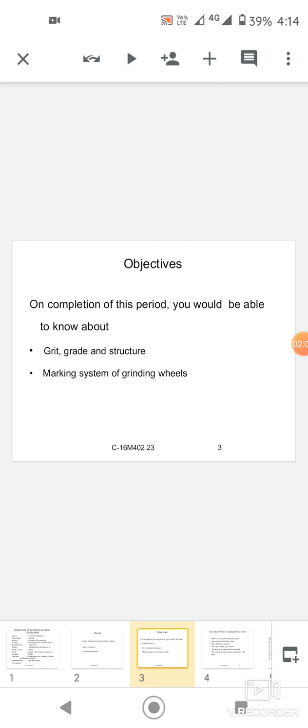This is the grinding wheel characteristic grit. It refers to the size of the abrasive grains. It influences the following factors: type of finishing desired, the material being machined, the amount of material to be removed, the area of contact between wheel and workpiece.

What is meant by grit, grade, and structure? First, grit. It refers to the size of abrasive grains. They are graded for size by passing them through a range of sieves, each of which has a definite size of the mesh. The meshes are generally used at building construction to remove particles from sand. The grains are numbered according to the smallest mesh through which they have passed. An abrasive grain and grit.

The term grade as applied to a grinding wheel refers to the tenacity with which the bond holds the abrasive grains in place and does not refer to the hardness of the abrasive. A wheel from which the grains are released rapidly during the grinding operation is called soft grade. A wheel that retains the grains more securely is called hard grade. By varying the amount and composition of the bond, wheels of different grades are obtained, discussed in the next slides.

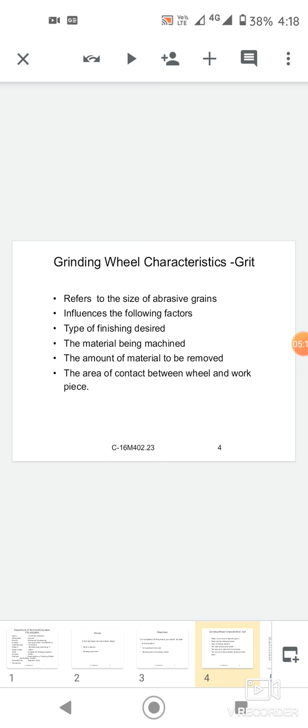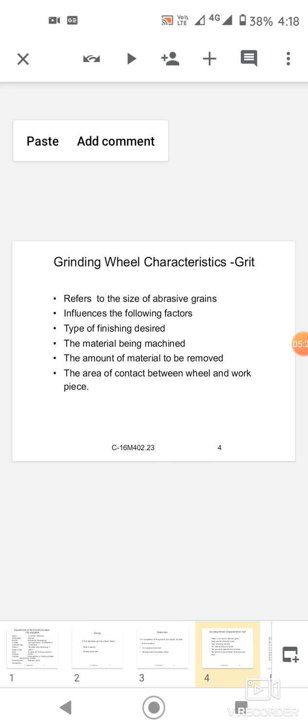Open structure grinding wheels are used on soft, tough, and ductile materials with heavy cuts, whereas dense structure wheels are used on hard and brittle material with finishing cuts.

This is the grain size or grit. An abrasive grain size 36 will pass through a mesh with 36 holes per linear distance of 25.4 mm, but will not pass through a mesh of the next smaller size. The usual size ranges from 10 to 120, number 10 being very coarse, meaning large grains, and 120 being fine, small grains.

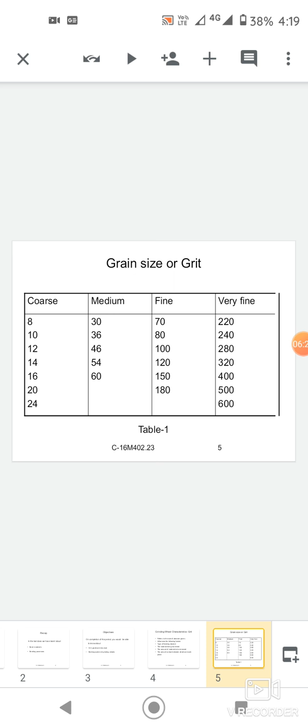Commercial grain sizes are classified as in the following table. This is the aluminum oxide abrasive grit particles. Abrasive grains for grinding wheels.

The grit size of a grinding wheel depends on the following factors: the type of finishing desired, material being machined, amount of material to be removed, area of contact between wheel and the workpiece. The first one is the type of finishing desired. Fine grains are used for producing smooth and accurate finish.

Material being machined: coarse grains are generally intended for soft materials while fine grains for hard materials. The amount of material to be removed: coarse grains are used where large amount of material is to be removed and the surface finish is not important. In the area of contact between wheel and the workpiece, for wider area of contact, a coarse grained wheel is generally used.

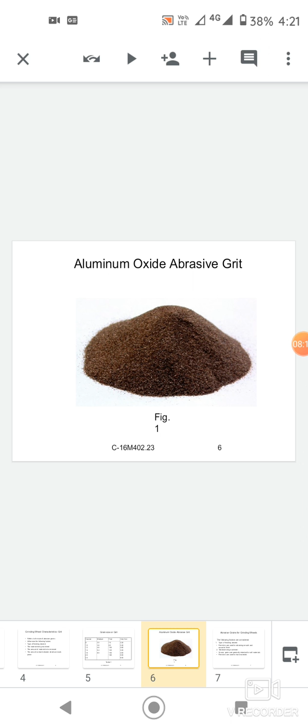Next is the abrasive grains for grinding wheels. The following factors: the type of finishing desired. Fine grains are used for obtaining smooth and accurate surface finish. Material being machined: coarse grains are generally intended for soft material while fine grains for hard materials.

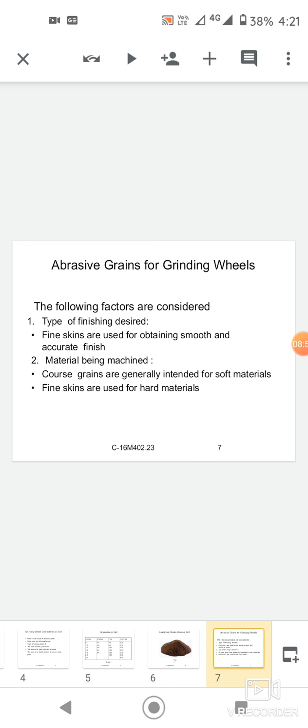Next one is the amount of material to be removed. Coarse grains are used where large amount of material is to be removed and the surface finish is not important. The area of contact between wheel and the workpiece: for wider area of contact, coarse grain wheel is generally used.

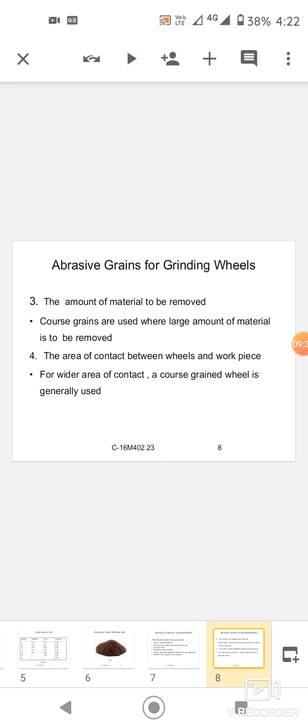Next one is the grinding wheel characteristic of grade. The term grade as applied to a grinding wheel refers to the tenacity with which the bond holds the abrasive grains in place and does not refer to the hardness of the abrasive. A wheel from which the grains are released rapidly during the grinding operation is called soft grade.

It refers to the tenacity with which the bond holds the abrasive. It is influenced by the following factors: the hardness of work material, area of contact, condition of machine, wheel and work speed. The wheel from which the grains are released rapidly during the grinding operation is called soft grade, whereas a wheel that retains the grains more securely is called hard grade. By varying amount and composition of the bond, wheels of different grades are obtained.

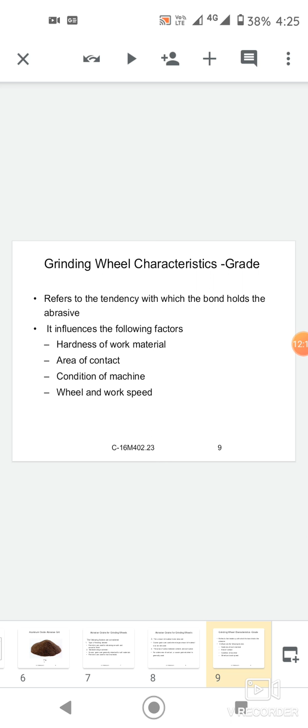Wheel and work speed: harder wheels are used for low wheel speeds and soft wheels are recommended for higher wheel speeds. On the other hand, hard wheels are used for high work speed and soft wheels for low work speed. These are the grades of grinding wheel. The soft grades are from A to H, medium is I to P, and hard is Q to Z.

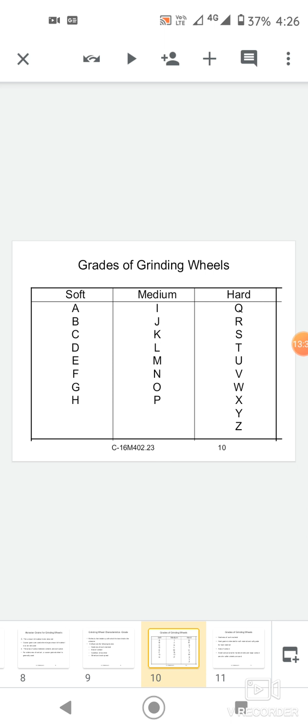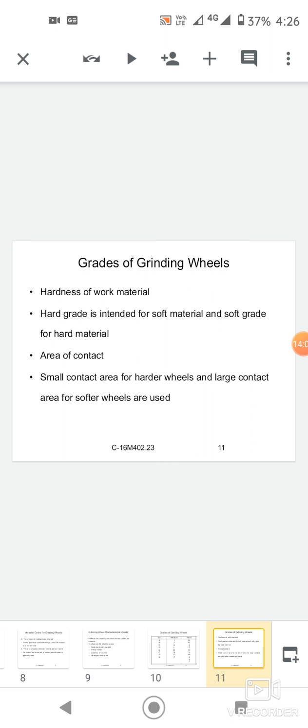Now, grades of grinding wheel. Hardness of work material: hard grade is intended for soft material and soft grade for hard material. Area of contact: small contact area for hard wheels and large contact area for soft wheels. And condition of machine: a rigid machine requires soft grades. Hard grades are recommended for light duty machines.

And wheel and work speed: hard wheels for low speeds and soft wheels for higher wheel speeds. Grinding wheel characteristics: structure. Structure indicates the abrasive grain spacing in the grinding wheel. A grinding wheel may have an open, meaning porous, or dense, meaning closed, structure. A grinding wheel with an open structure has more voids than one with a dense structure.

Dense is from 0 to 8 and open structure is 9 to 15 and above. The structure of grinding wheel depends on the hardness of work material, the finish required and type of grinding operation. Open structure grinding wheels are used on soft, tough and ductile material with heavy cuts. Dense structure wheels are used on hard and brittle material with finishing cuts.

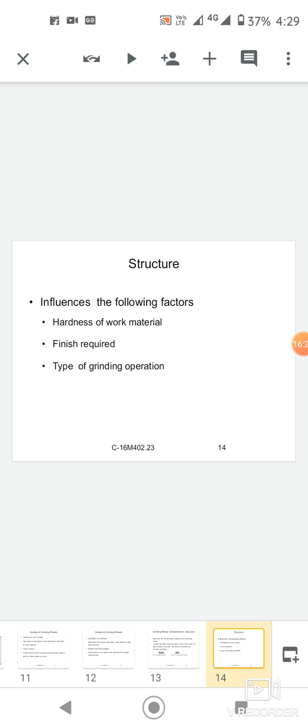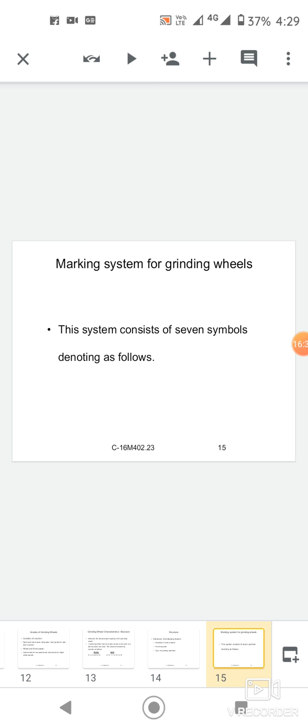The structure is denoted by numbers ranging from 0 to 15. The lower number indicates a dense structure and a higher number indicates an open structure. Structure influences the following factors: hardness of work material, finish required, and type of grinding operation. For grinding wheels, this system consists of 7 symbols. Grain size, grade and other characteristics of grinding wheels are indicated by standard marking.

First, what is grade? Grade represents the bonding between the abrasive grains of the grinding wheel. Hard and soft grades represent the kind of bond. Hard grade wheels have a stronger bond than soft ones. Hard grade wheels are used for soft materials, whereas soft grade wheels are used for hard materials. That is the grade, grain size, and other characteristics.

All the grinding wheels are identified by a standard marking system established by the Indian Standard Institute, IS 551 1954. The system consists of 7 symbols in the same sequence as indicated: WC54M3V17. The first one, W, indicates the manufacturer's symbol for the type of abrasive. It is optional.

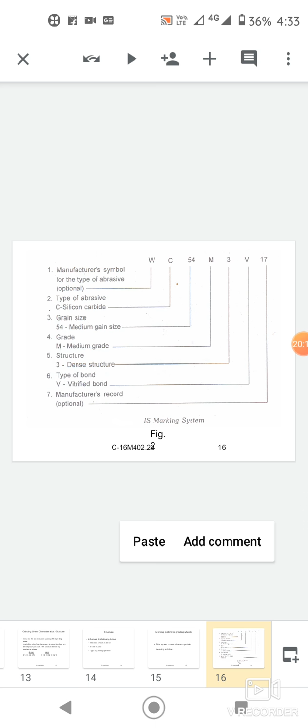Grain size: here it is the medium grain size. Grain size values are coarse grain size, medium grain size, fine grain size, and very fine grain size, as in this table. The grain size here is 54, and it is medium grain. So M means medium grade.

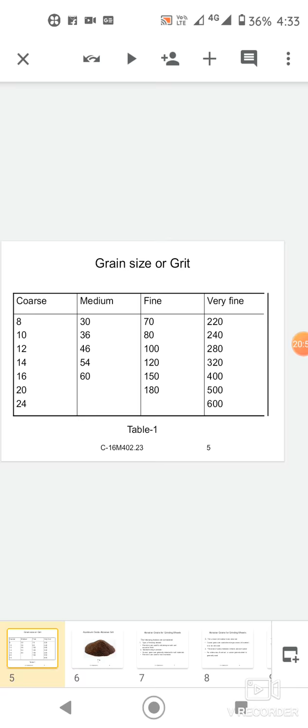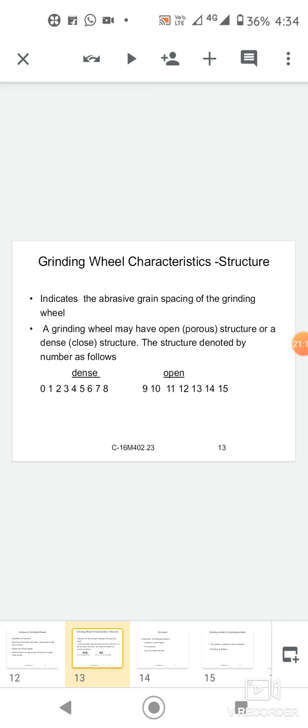And structure 3 is a dense structure. This table shows open structure and dense structure. 3 is a dense structure. If, for example, 12 is taken, that is an open structure, okay, and 3 is a dense structure. Type of bond: V indicates vitrified bond.

And S indicates the silicate bond. B indicates the resinoid bond, and oxychloride bond is indicated by O. Rubber bond, shellac bond, these are the types of bond in the place of V. Next one is the manufacturer's record, that is the value 17, optional.

In the manufacture of wheels, first is the grit. Grit means the grain size, which affects the grinding capacity and the surface quality of the workpiece. Grinding wheel with coarse grains removes large metal but produces rough surface. Grinding wheel with fine grains improves the surface quality but grinding capacity decreases.

Next is the grade. Grade represents the bonding between the abrasive grains of grinding wheel. Hard and soft grades represent the kind of bond. Hard grade wheels have stronger bond than soft ones. Hard grade wheels are used for soft materials, whereas soft grade wheels are used for hard materials.

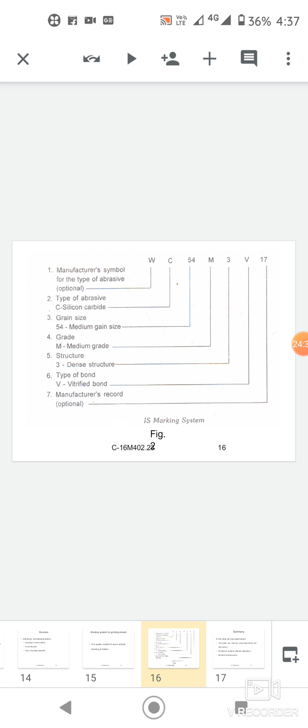And the structure, or grain spacing, affects the rate of machining. Grinding wheels have an open structure or dense structure. Open structure with large voids and wide spacing has a higher capacity than dense closed structure. Due to easy flow of chips, the open structure wheels are used for grinding soft materials. Dense structure wheels are used for grinding hard materials.

And in this class, we have learnt about grit, grade and structure of grinding wheels and their factors, and suitable grade for different applications, and the standard marking system. Grit, grade and structure questions are also asked in competitive examinations as multiple choice, and theoretical questions are also asked, on open structure and dense structure, what is the grade, grit size, structure. So write shortly on grit.

Grit refers to the size of abrasive grains. They are graded for size by passing them through a range of sieves, each of which has definite size of meshes. The grains are numbered according to the smallest mesh through which they have passed. An abrasive grain size 36 will pass through a mesh with 36 holes per linear distance of 25.4 mm.

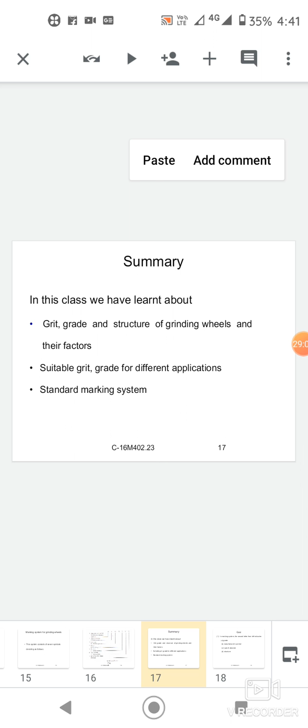It is very important, and the grade of grinding wheel depends on the factors: hardness of work material, area of contact, condition of machine, wheel and work speed. A rigid machine requires soft grades. Hard grades are recommended for light duty machines, and hard wheels are used for low wheel speeds, and soft wheels are recommended for higher wheel speeds. On the other hand, hard wheels are used for high work speed and soft wheels for low work speed.

The hard grade is intended for soft material and soft grades for hard material. For larger area of contact between workpiece and grinding wheel, soft wheels are used. Smaller area of contact requires harder wheels, and rigid machines require soft grades. And structure is very important.

It indicates the abrasive grain spacing in the grinding wheel. Grinding wheel may have an open structure or closed dense structure. Grinding wheel with an open structure has more voids than one with a dense structure. The structure of grinding wheel depends on the hardness of work material, the finish required, and type of grinding operation.

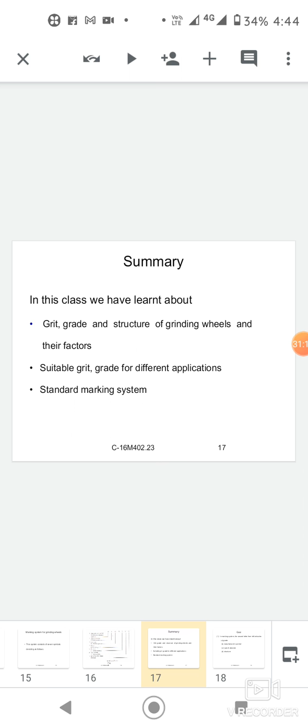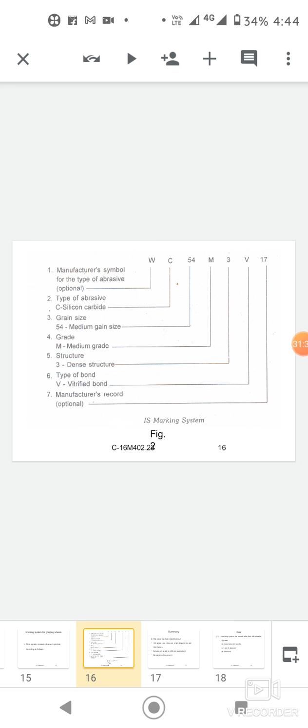And this type of question is very important because the values change, the symbols, numbers and alphabetical letters also change. That is very important for short questions. So learn it. The marking system second letter from left indicates the type of abrasive. Answer is type of abrasive, for example silicon carbide.

Grit of abrasive indicates what? It affects the capacity and the surface of the workpiece; coarse or fine grains remove large metal. It is the grain size, so the answer is the grain size.

And a frequently asked question: what are the various factors considered for selecting the grinding wheel? That is the hardness of work material, area of contact, condition of machine, wheel and work speed. Write short note on any two of the following: grit, grade and structure. This type of question is also asked.